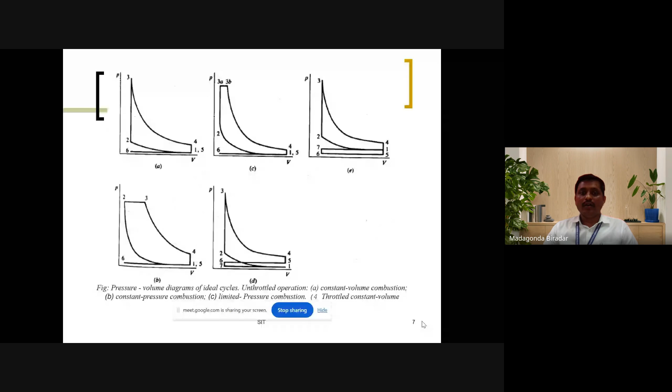I did my M.Tech from KREC Surathkal, currently NITK Surathkal, in the branch of heat power, and B.E. from Bangalore University in mechanical engineering. Sir has more than 60 plus national and international journal papers, and he has contributed to different numbers of chapters in books, totaling more than 4 chapters in different books. In conferences he has published more than 40 journals, and in international conferences more than 25.

Sir also has more experience regarding this clean energy for automobiles, and he has guided more than 10 students for PhD, more than 10 students for MTech by research, and more than 25 students for only MTech. Sir has lifetime membership in different bodies like the Combustion Institute, and was a BOE member at UVCE Bangalore. He was co-chair during the national conference in 2010 held at NIT Surathkal. He was also a member of the BOS at different institutes, both government and various private universities. Sir has delivered more than 50 invited guest lectures throughout the nation.

If I speak about the achievements of Dr. Kumar G N, it is a very long way, so I'll stop here with a short introduction. Sir, thank you, sir. I welcome you for this FDP, sir, which is sponsored by Atal AICTE, sir.

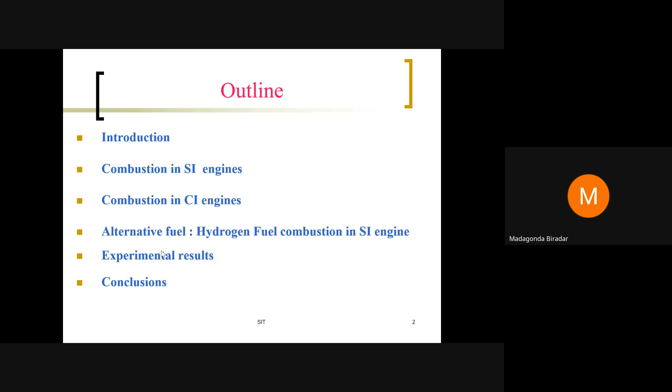Good evening, everyone. Actually, even my student is also there, my friend Chitragar. Good evening, Chitragar. Good evening, sir, and welcome to this platform. Thank you, very happy to see you come, sir, after a long time.

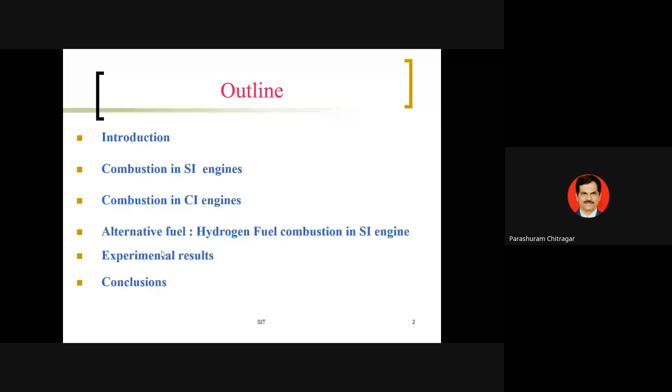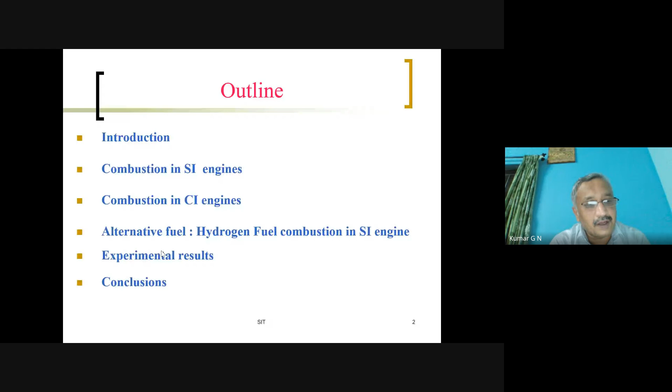Yes, sir. Dear friends, I would like to give some introduction to the IC engine, because nowadays electric vehicles are also competing with IC engines, and why this green energy is very, very important, I'm going to highlight with my presentation. If you have any queries, at the end I'll take the queries.

Fuel, I mean, is not a new concept. It has maybe 150 years of history, but still there is a lot of research going on related to the IC engine. Not only changing the design of the IC engine, but they are also working on fuel, because even by changing the fuel or cleaning the fuel, we can reduce the emissions produced by combustion. So combustion is a very important thing in the IC engine. Already as a mechanical engineer or energy engineer, we have studied thermodynamics, and we know that thermal efficiency is a very important parameter in combustion.

By that number, we can say whether the combustion is good or not, or the device is good or not. For example, whenever we buy a vehicle, the first thing we see is what mileage it can give. But at laboratory level, we generally measure specific fuel consumption, that is how much fuel is consumed for producing 1 kilowatt.

So combustion is a very important process in the IC engine, where chemical energy is converted into heat energy and then mechanical energy within the IC engine. It is an exothermic chemical reaction where fuel and air burn, and products plus heat are released. So how much heat is released is a very important thing for us.

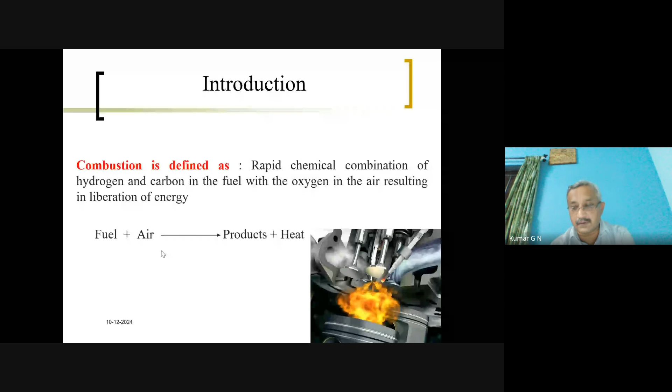It means we are saving a lot of fuel by improving the thermal efficiency, redesigning the engine, or changing the quality of the fuel. Now, about ignition: when we design any IC engine, we have to provide proper fuel and proper air.

Only then will the combustion be stable and proper emissions released, with the right quantity of heat liberated. Even if you make it a rich mixture, with more fuel concentration, or a lean mixture with more oxygen concentration, the combustion will not be stable. To make it stable, we have to operate with a limited fuel-air mixture.

For example, in a petrol engine, generally 14.5 kg of air is required for burning 1 kg of fuel. So near that stoichiometric condition, we can operate the engine, but if you go beyond some limit...

We have to keep in mind that it should burn properly, because in an IC engine we need more power in a given time, that is in milliseconds. So the combustion should be fast. The property of the fuel is a very important thing to keep in mind.

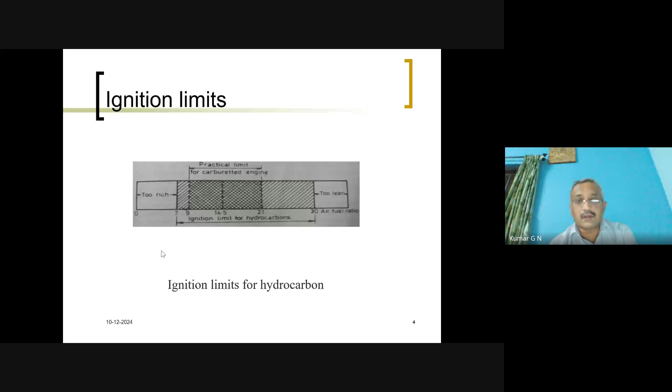This is a basic concept, not new. Our IC engine works just like a war cannon. In a cannon, what happens? We keep some gunpowder and ignite it.

In front of that, an iron ball will be there. As soon as we ignite, the gunpowder burns and tries to expand, that is, it explodes. Due to that, a high pressure wave is released and it strikes the iron ball, hitting it and making it move. We can analyze the same concept in an IC engine.

In an IC engine, there is a cylinder, and inside the cylinder, a piston. The piston movement is based on the combustion of the fuel. As I said, the combustion takes place in milliseconds, that fast.

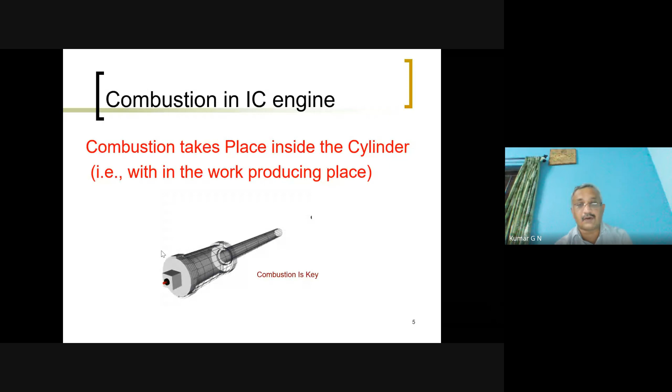Because every cycle may run at 1500 rpm, or for a racing car maybe 20,000 rpm, in a four-stroke engine the combustion should happen in terms of milliseconds. So even though it's a cycle, the duration of combustion is still very short. Based on this combustion, the IC engine's basic processes are defined.

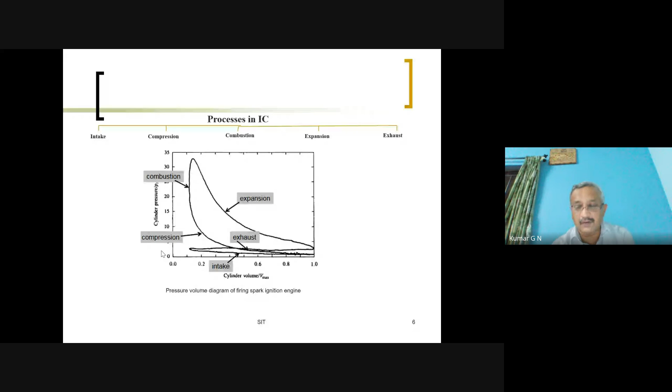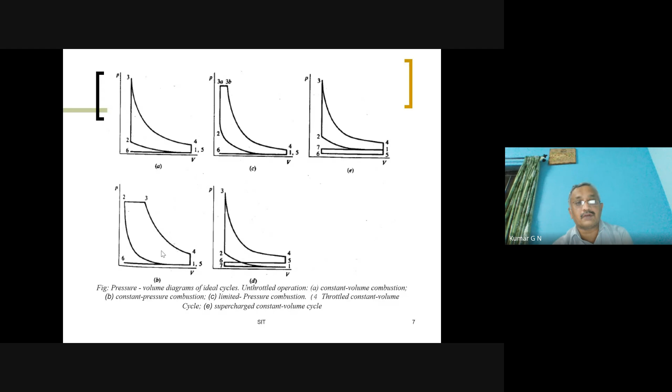There are different types of IC engines, including petrol engines with constant volume combustion, and diesel engines with constant pressure combustion, etc. In which process the combustion happens and how heat is added is very important. The petrol engine works on the Otto cycle and the diesel engine works on the diesel cycle. So based on fuel property, we choose the engine.

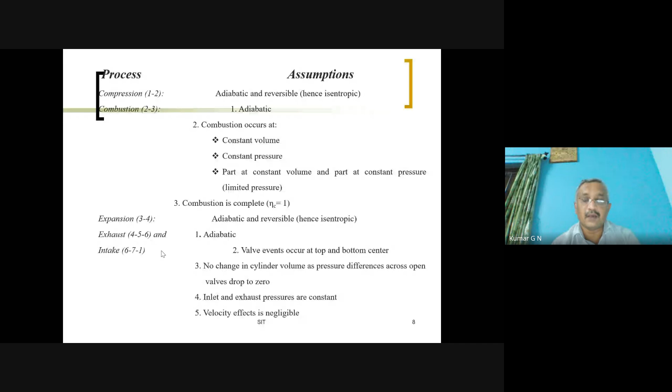Even nowadays, research is happening related to alternative fuels. For the spark ignition engine, we can choose LPG gas, CNG gas, or even hydrogen, which is what I'm going to present today. And with respect to diesel, even now the Government of India is talking about biodiesel or other alternative fuels.

Generally, it is a biodiesel, and even ethanol is used as an alternative fuel for the ICE engine.

With respect to engine design, we can improve thermal efficiency in two ways. One is by redesigning the engine, that is, the components can be redesigned so that the combustion will be good, and whatever power is produced within the cylinder will be transferred at the end, available in the shaft, the crankshaft.

With respect to the suction stroke, we already know the latest technology - they are trying to replace the valve with solenoid valves. When you see this, mechanical operated valves with solenoid valves allow us to avoid pumping losses and improve volumetric efficiency.

With respect to each stroke, a lot of research is happening and new technologies are introduced. Instead of natural aspiration, we have moved to the supercharger or turbocharger, so that we can pump more air. When we pump more air, we can pump more fuel and burn it. After burning, more heat will be released, and we can convert that into power. It means that for a given volume, we get more power output by adopting a supercharger or turbocharger.

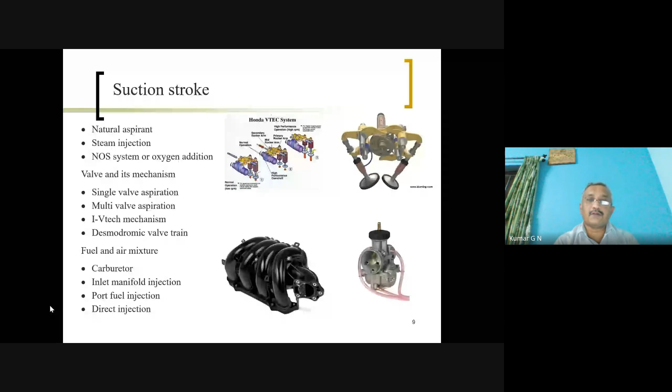With respect to the compression stroke, there is a variable compression ratio, even in running vehicles. Whenever we require a change in compression, we can do it, or even cylinder deactivation - we can cut off combustion in a multi-cylinder engine by operating with only one. So that new technology has come in, and as I said, the gasoline direct injection (GDI) system is already introduced, and most vehicles are coming with this technology.

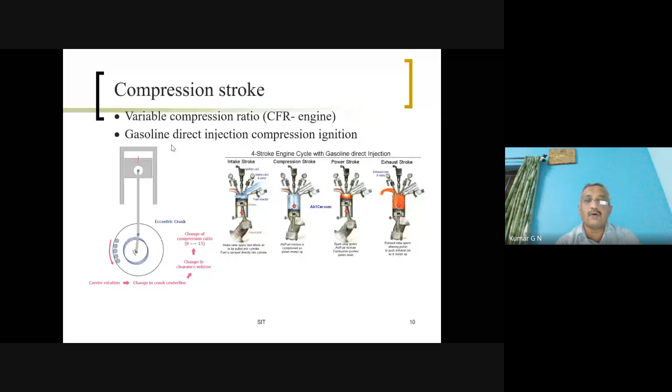And already, with respect to ignition, a lot of research is happening, and nowadays digital electronic ignition system is there. In the digital electronic system, it gives the minimum ignition energy and timing, because there is no misspark, whether you take a multi-cylinder engine or a single cylinder engine.

That heat addition - as seen in the first slide, fuel plus air, if two reactants are there, combustion won't be initiated. It requires some minimum ignition energy. That minimum ignition energy has moved from the magneto system to the digital electronic system. But the latest technology, at a laboratory level, is a laser ignition system. People are still working on that - it's not yet implemented in public vehicles, but presently the digital electronics ignition system has been introduced.

That is just like sorry. This is the old system. Just a minute.

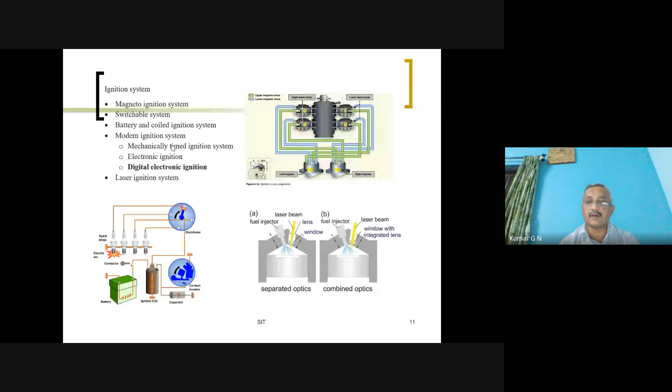Okay, this is the old system, and new systems are coming in. In the exhaust stroke and manifold, so as I said, by introducing a supercharger or turbocharger, we can improve the power output.

So that's one aspect. The second one is the catalytic converter, so that we can reduce the emissions, including carbon monoxide, unburnt hydrocarbon, or nitrogen compounds. So nowadays we are using SCR catalyst, selective catalytic reduction, so that NOx emission can be reduced.

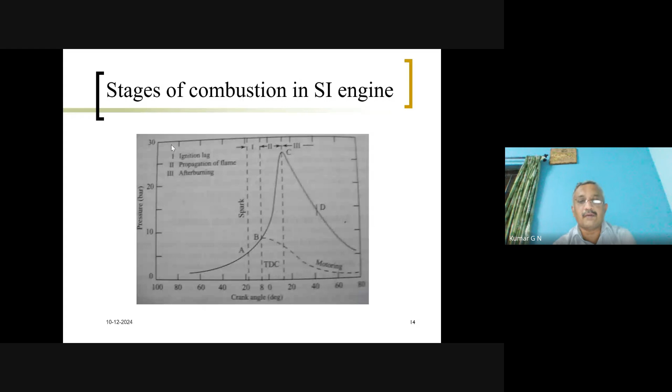Okay, so a lot of research is happening. These are individual topics, but I'm not covering these things. I'll be focusing on hydrogen.

So as I said, why alternative fuel and what are the benefits to the country? Maybe every day nowadays you might have seen e-vehicles are coming, electric vehicles. They are quoting that it is a zero emission vehicle.

Okay, but if you look into basic things, actually it's not a zero emission vehicle, that e-vehicle, because it requires electricity, and electricity we are producing using fossil fuels, maybe coal or diesel. So when we burn coal, again carbon monoxide or carbon dioxide will be released to the atmosphere, not in urban area, but wherever we are using electricity. In some other places we are burning coal or fossil fuels, and we are producing carbon dioxide and carbon monoxide, or harmful emissions, and we are adding to the atmosphere.

That is, total emission will be same whether you use them. But only thing is, when we produce electricity it's far from place, maybe 1,000 kilometers away from the urban city.

So when we supply current from one place to another place, there will be loss of electricity. That is, if you produce electricity at some 1,000 kilometers and supply to the urban area, maybe only one unit will be available and one unit will be lost. Out of 2 units, 1 unit will be lost and 1 unit will be used. So a lot of emission will be added.

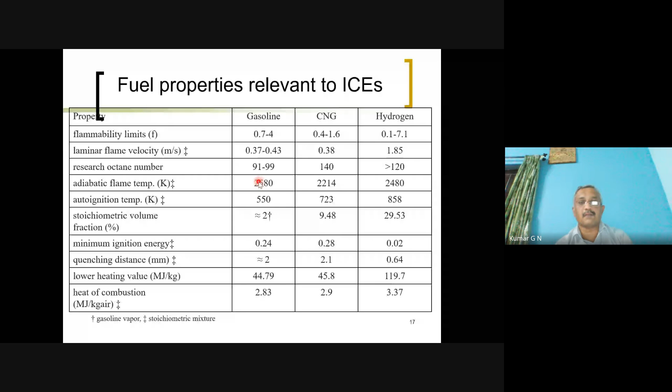Similarly, whenever we add any additives with gasoline, just improving the velocity or improving the octane number, sometimes the density will increase or the combustion may not be proper. So while choosing any fuel, we have to ensure proper combustion so that thermal efficiency will be improved and emissions will be less. These are the things we have studied in IC engines.

The flame speed mainly depends on this. With respect to the spark ignition engine, fuel ratio is a very important thing. Whether you work with petrol, as I said, we operate with an equivalence ratio of 0.9 to 1.1, and engine size also varies. If you go for a bigger size engine, sometimes we go for multi-spark ignition.

Ratio again - in the homogeneous charge compression ignition engine, we can use petrol or diesel, but again it's under laboratory conditions. With respect to the fuel, we can change the compression ratio so that we can optimize with respect to size or fuel ratio, and based on the application also.

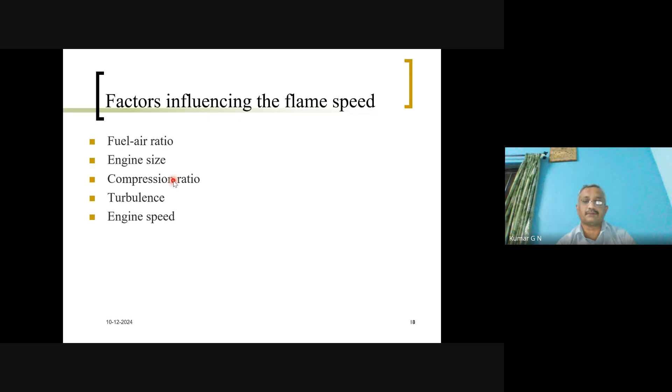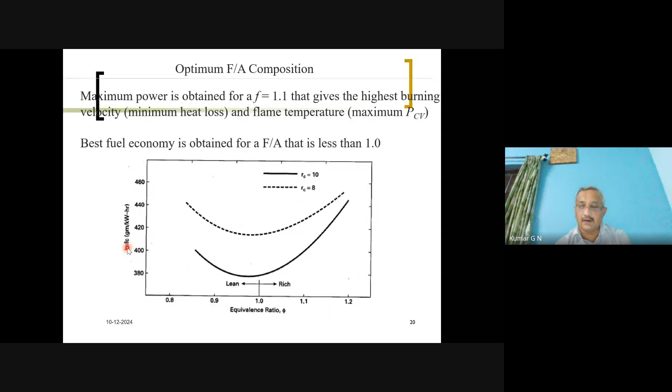With respect to spark timing, when we take any alternative fuel, we have to optimize the spark timing. That is also very important, otherwise the output power will be less.

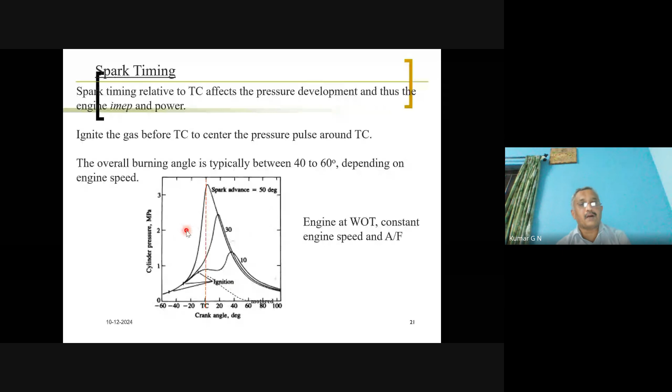When you produce a spark at 30 degrees, after ignition lag, the combustion happens normally, and when you measure the area under the curve, it will be better than the other cases. So for any alternative fuel, optimizing the spark timing is very important.

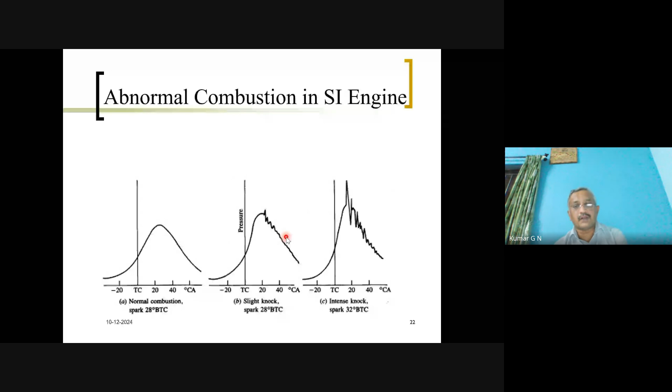If spark timing is not optimized, in designing an SI engine, abnormal combustion is another disadvantage. If the engine is not cooled properly or burning happens at different conditions, abnormal combustion occurs during the expansion stroke, starting at multiple places and producing abnormal pressure disturbances that strike the piston head, cylinder walls, or valves, causing erosion and increased engine vibration.

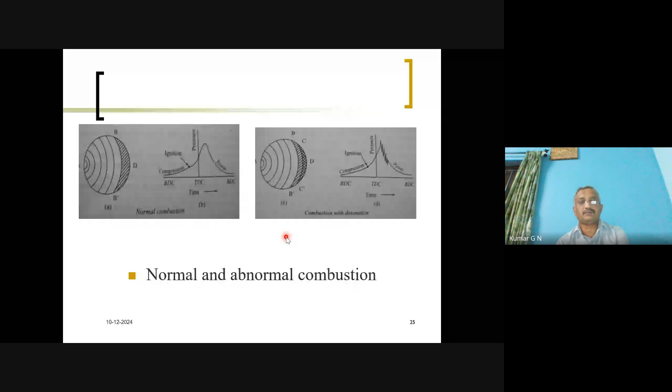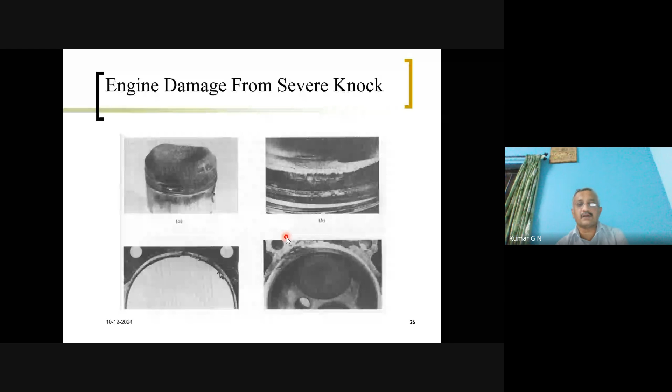Once knocking occurs, a high pressure wave strikes the surface and erosion takes place. You can see the shape of the piston head, edge of the piston, valves, etc., where erosion has happened.

Moving on to alternative fuel, why alternative fuel is required, and energy is also a very important thing.

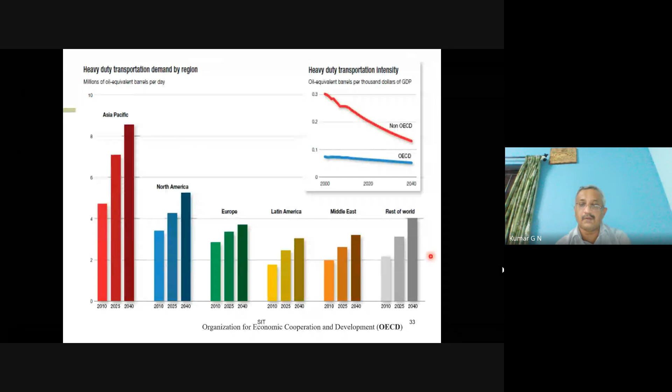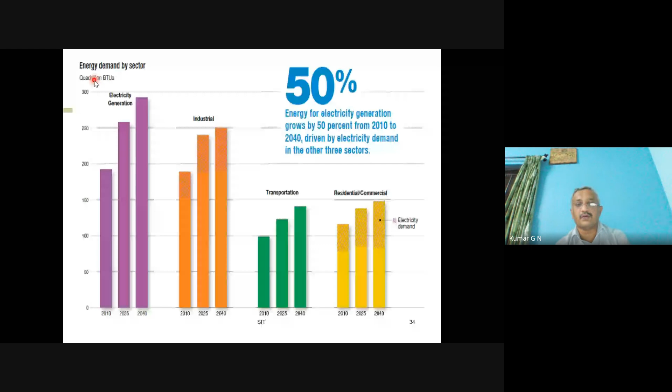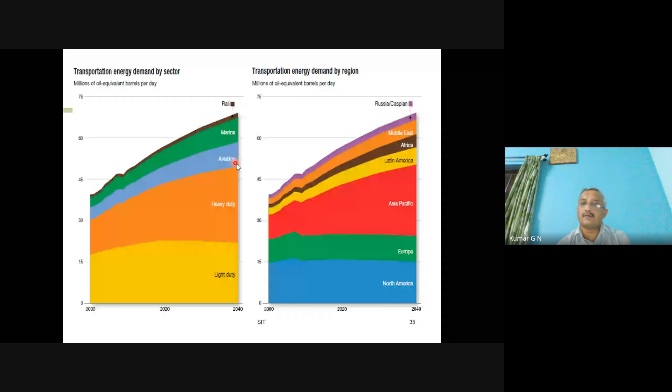And with respect to the countries, same information, and again the same information. You can observe here. So before that, we mainly depended on fossil fuel like gasoline, diesel, or jet fuel. But nowadays, a lot of research is happening related to ethanol and other fuels, including biodiesel. A lot of literature and methodology is available.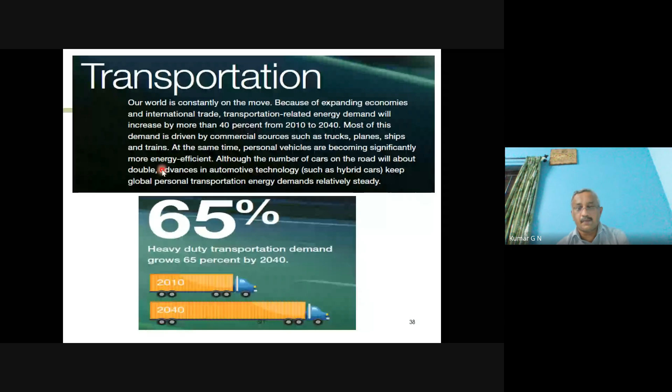And with respect to transportation, demand is growing, and because of this, carbon dioxide emission is also increasing day by day, because when we burn hydrocarbon fuel, whether petrol or diesel, again it's made up of hydrocarbon. LPG, that is propane and butane, CNG is methane - most of the fuels are hydrocarbon fuel. So when we burn hydrocarbon, carbon dioxide and nitric oxide emissions will be released to the atmosphere.

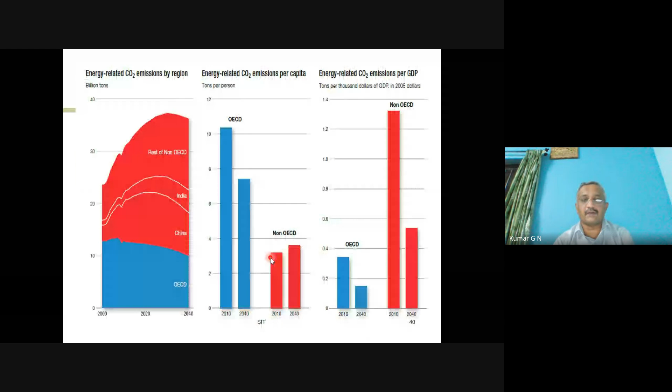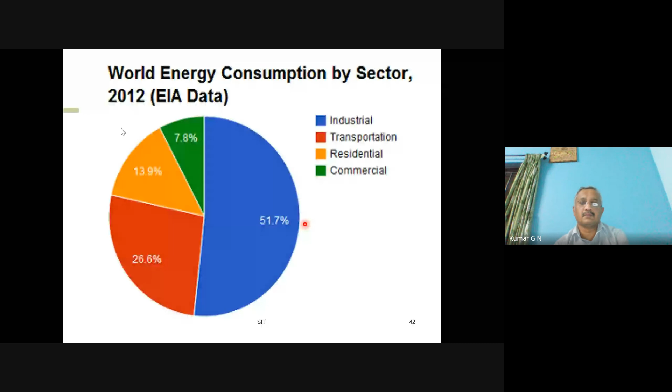Now, as I said, maybe in future we may move to fuel cell technology, but presently there are some disadvantages, and the technology is not mature enough to release to the public. Maybe once it gets stable and research happens, it will be released, other things will go up, and fuel cell technology will dominate.

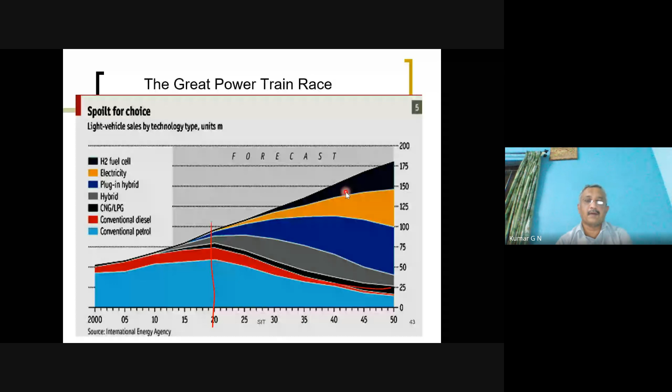So presently, even the government of India is giving importance to clean fuel, whether with respect to petrol, diesel, or any alternative fuel. So the present government is talking about clean fuel like hydrogen, because hydrogen is a single chemical component. After burning, it will produce only H2O, that is water. So if you operate within some fuel range, NOx emission can be reduced.

So like this - why the advantages? When you take anything, whether fossil fuels, again it is hydrocarbon, the hydrogen will be present. We can separate carbon and hydrogen, and we can store the hydrogen, because nowadays hydrogen can be produced from methane, that is CNG gas. So I'm going to tell that technology - methane reforming method.

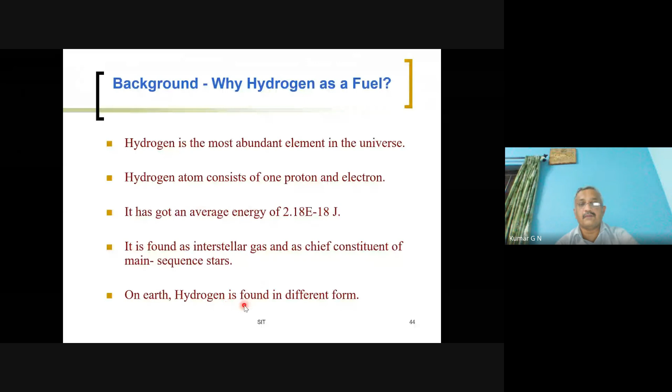Hydrogen atom consists of one proton, and this is the physics of hydrogen. You can observe it's found in different forms on the earth, but compared to petrol or diesel, it is not available very easily. Generally it is accompanied with another chemical element. If you want to separate that other chemical element, we need energy. So that energy cost is also included in hydrogen.

For example, in school days we studied the electrolysis method - water can be split into oxygen and hydrogen. But only thing is we need electricity. So it is expensive presently, but nowadays a lot of research is happening related to renewable energy. Using a gasification method, we can produce hydrogen, or we can go from liquid CNG gas or liquid natural gas and convert it into hydrogen. So there are a lot of new technologies, and people are working on the production of hydrogen.

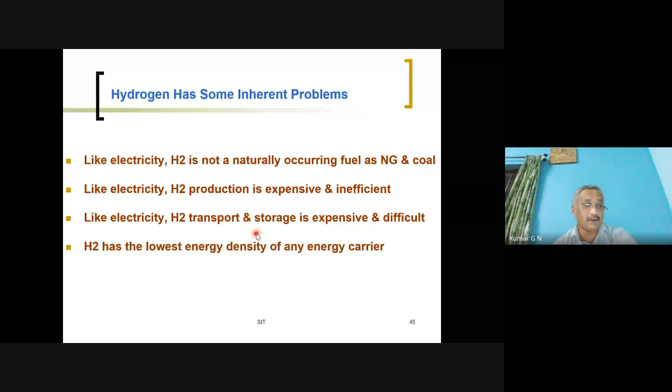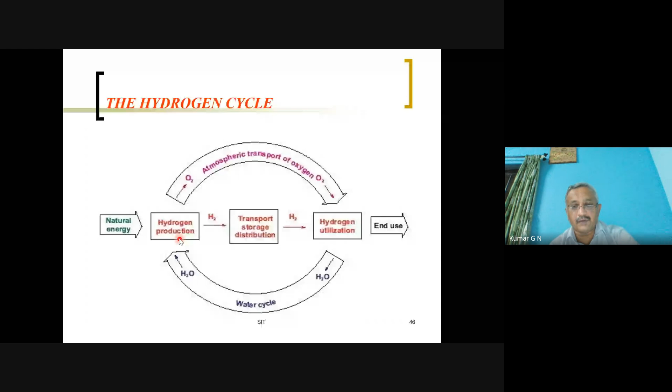When you see our present government's advertisements or publicity, generally it's given on hydrogen production, hydrogen storage, or hydrogen utilization. It's not only used in ICE engines, it can also be used in fuel cell vehicles. So a lot of funding is available with respect to production, storage, or utilization. The government is giving encouragement here.

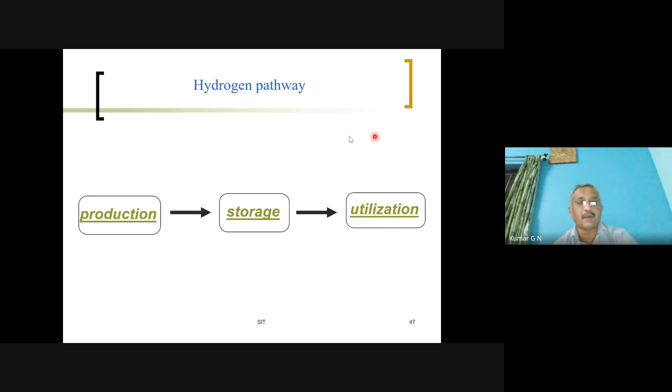When we focus on production, there are three popular methods. One is steam reforming, where we convert CNG gas into hydrogen. Second is electrolysis of water, using electricity and water to produce hydrogen. Third is renewable energy sources, where biomass including wood can be converted into hydrogen and carbon monoxide, which we can store. Other methods include direct thermal decomposition of water, decomposing H2O into H2 plus O2, which requires high thermal energy, maybe around 2500 degrees. But this is an expensive method. The next method, for safety reasons, uses nuclear energy.

Presently, even in India, people are working on all these three methods. Even IOCL in Faridabad is working on the steam methane reforming method, converting CNG gas into hydrogen. And in Dwarka, they opened a hydrogen fuel station, which is hydrogen plus methane, that is CNG gas. Generally they call it hydrogen fuel, and IOCL supplies it. Electrolysis of water happens everywhere throughout India. Presently, if you buy 1 kg of hydrogen, it costs around 2000 rupees. But once steam methane reforming comes more widely, the cost will decrease.

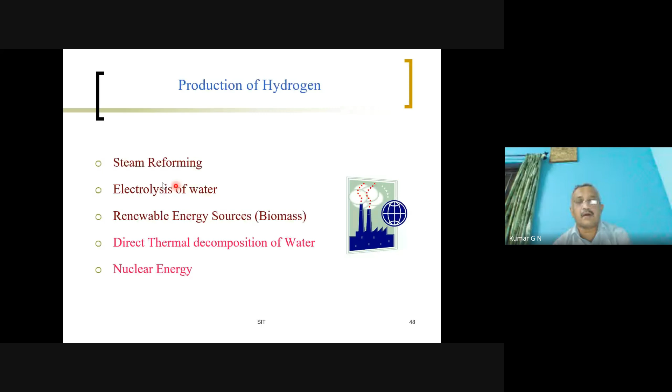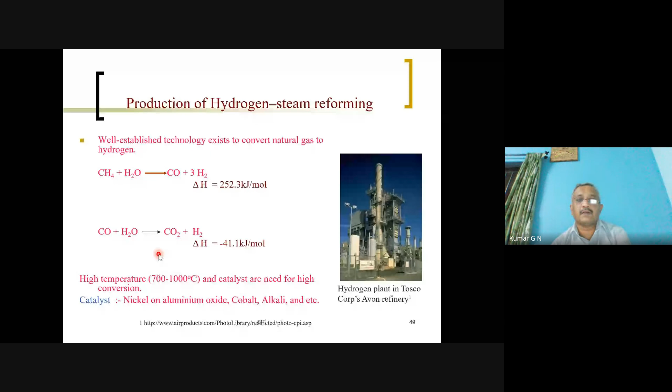When you take methane, it is reacted using some catalyst, nickel on aluminum oxide, producing carbon monoxide and hydrogen, which we can supply wherever we want. That is the advantage and disadvantage. You can observe methane is available, produced and transported through pipeline, or we can store it and supply through road transportation. In this method, steam and CNG gas is supplied, the temperature is maintained and catalysts are used, so finally hydrogen is produced.

Looking at the advantages and disadvantages: we can supply hydrogen through a pipeline system, and it is the most cost efficient current hydrogen process. However, it uses finite resources, because CNG gases are available only in limited places, so the plants we set up are limited by this resource. Also, rising natural gas prices mean the final price of hydrogen also mainly depends on the natural gas price.

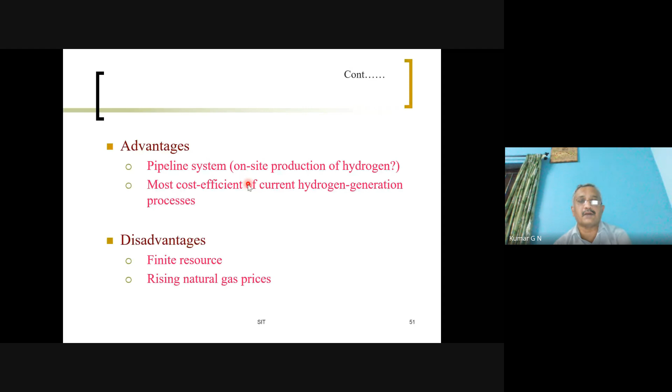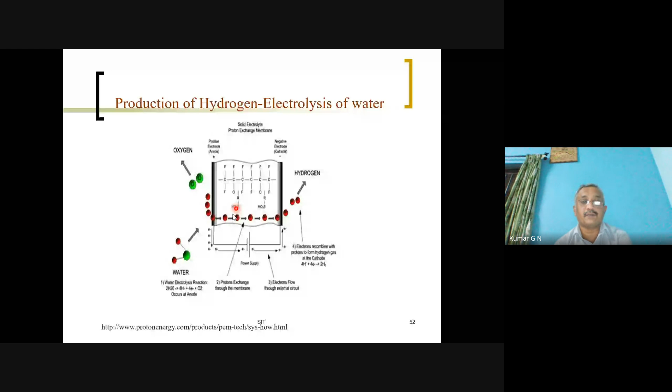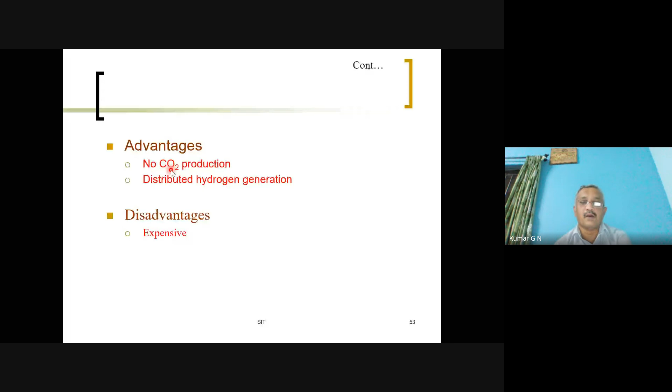This is the second method of producing hydrogen, electrolysis of water. You can observe hydrogen can be produced using electricity. The advantage is it's free from carbon dioxide, because after producing, only H2O, I mean H2 plus O2, will result. We can produce hydrogen wherever we want, and it's a small system, but it is expensive because we are using electricity.

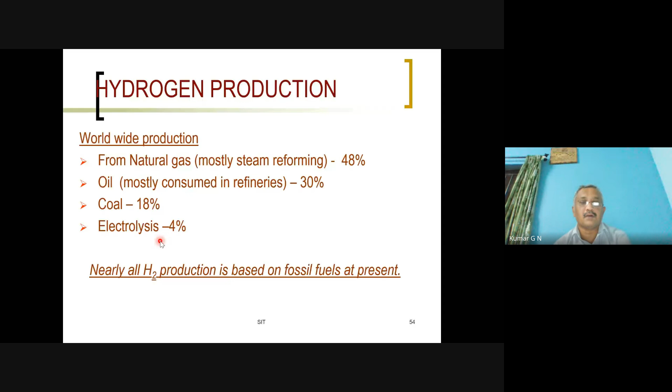I think one slide is missing here. Now, storage - you might have seen hydrogen cylinders, typically red cylinders made of steel. But nowadays, for automobile purposes, the cylinder materials have changed.

Hydrogen can be stored in three ways. First, as compressed gas, maybe up to 700 bar we can fill in a cylinder. Second method is liquid hydrogen - in India, ISRO and Tata Motors are working on this, because ISRO is expert in liquid oxygen and liquid hydrogen handling, and Tata Motors is developing fuel cell based vehicles, so maybe in future it will come. Third is metal hydride, as I said, IIT BHU is working on this method, where hydrogen can be stored in metal so that at high temperature, hydrogen is released and supplied to the engine.

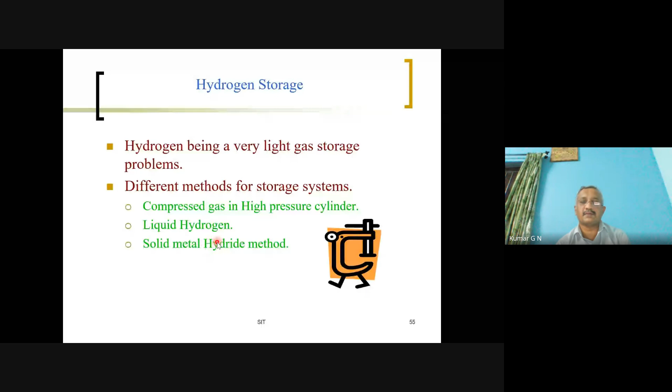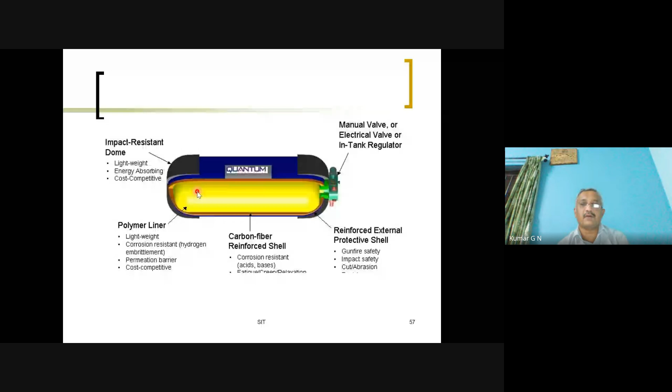This is the advanced version of hydrogen cylinders, nowadays available even in the Indian context. We can store up to 400 bar, or Type C cylinders up to 700 bar. For liquid hydrogen, a disadvantage is that the temperature must be kept very low - it's a cryogenic condition we have to operate under.

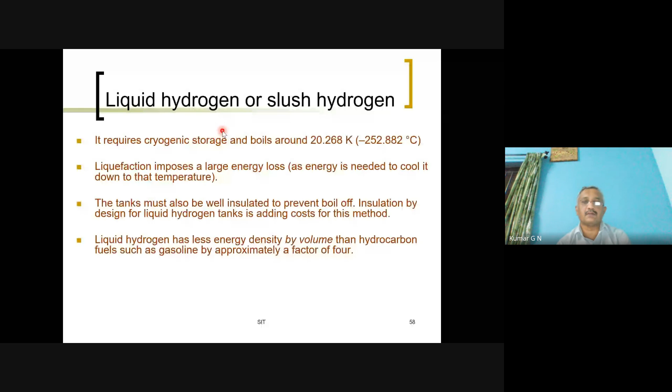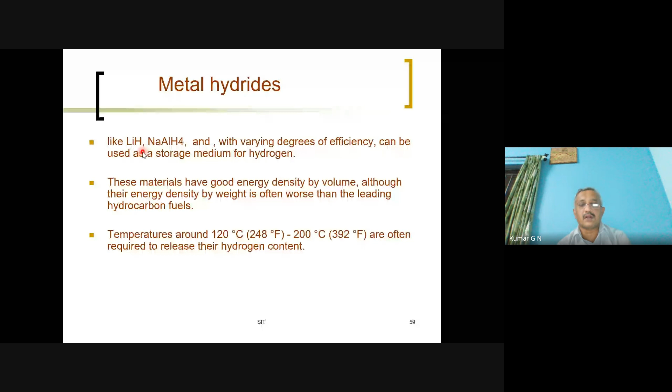Metal hydrides. You can observe lithium hydride or sodium aluminium hydride are used so that hydrogen is stored in metals, and at high temperature it will release and can be used. This is the work I did at IIT Delhi.

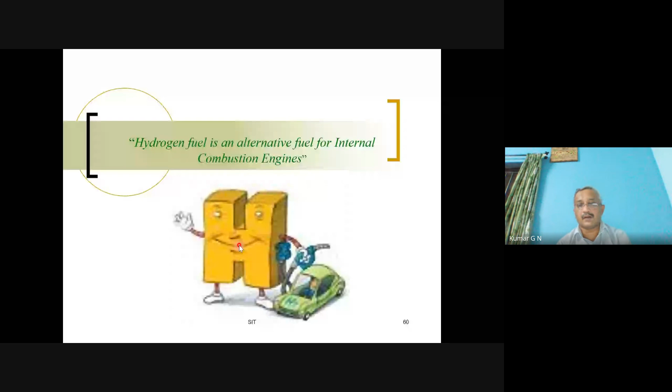Not only other people, even our former late Dr. Abdul Kalam ji also said we have to work towards clean fuel, that is hydrogen. By 2020 - but we have passed 2020 - the government of India is giving importance to clean fuel.

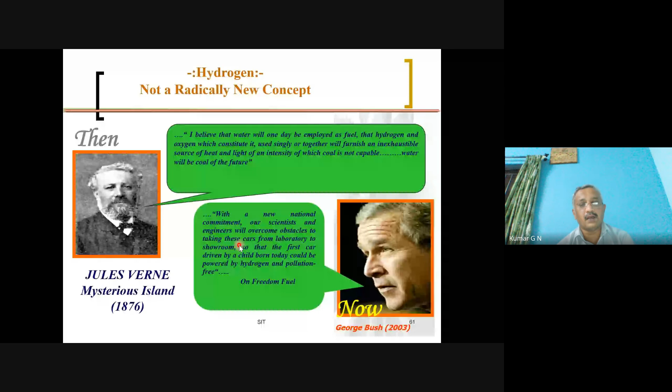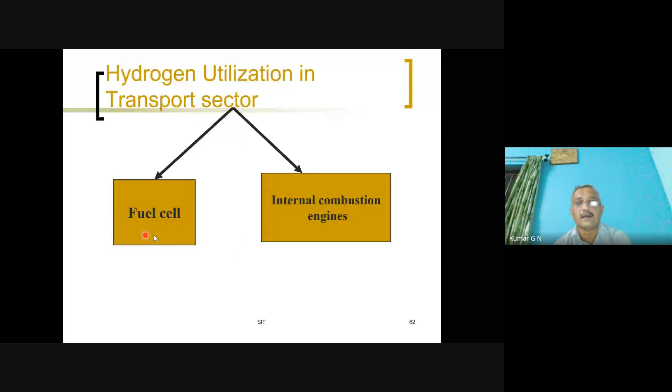So when we produce, or after transportation, the utilization is a very important thing. Not only for space application, on road also we can use it, in the form of two methods: one is fuel cell, and the second one is internal combustion engines. You can observe advantages and disadvantages with respect to hydrogen fueled IC engine and fuel cells.

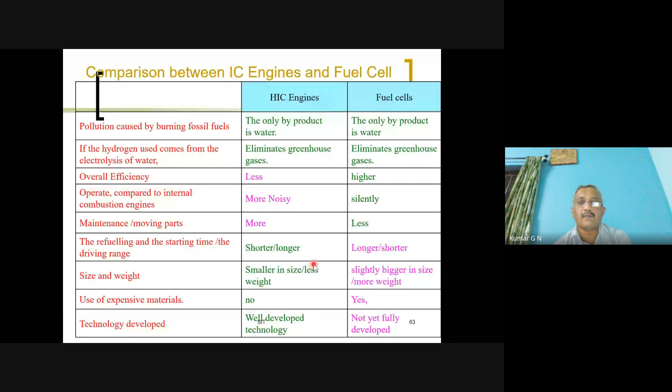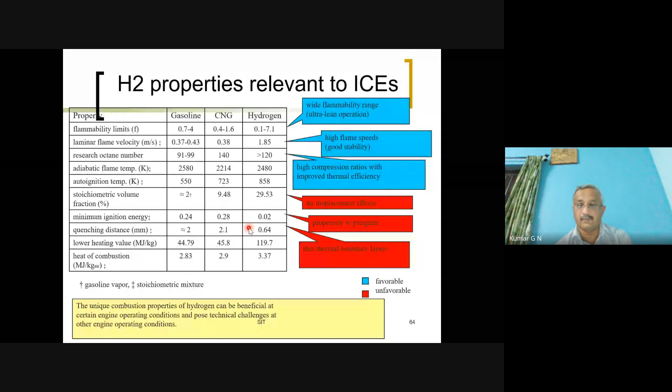When we develop an IC engine fueled with hydrogen, we experience this type of thing - or anybody, when you do a literature survey, you'll find flashback or backfire, pre-ignition problems, or rate of pressure rise. Flashback or backfire occurs due to the minimum ignition energy present in the valves or cylinder, or residual gases being present. This carries some heat energy that gets added to the hydrogen-air mixture. Combustion starts maybe during the suction stroke, or during the start of the compression stroke, and once combustion happens, the rate of pressure rise will be very high.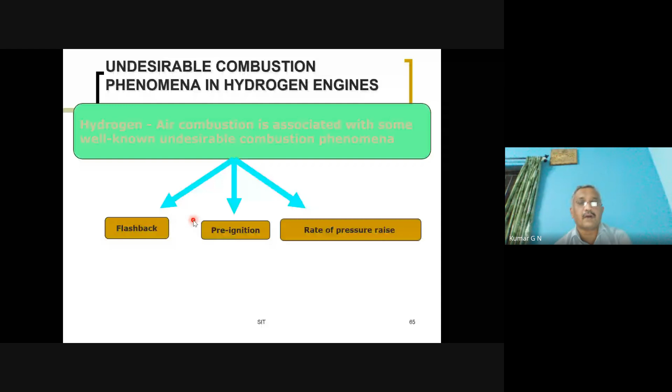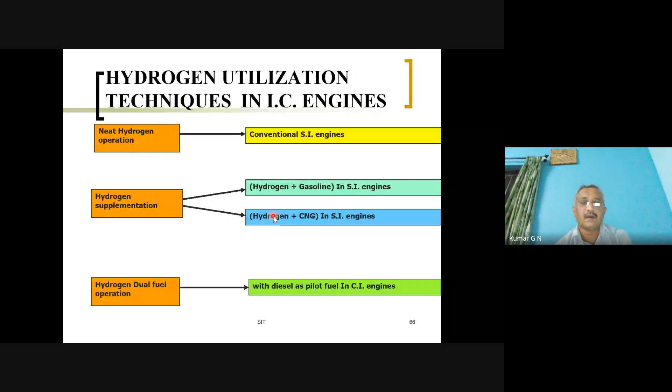We can overcome these disadvantages by developing a proper fuel injection system. So hydrogen can be used as an engine fuel, but only a few percentage of hydrogen is used in CI engines. In SI engines, we can completely or partially replace gasoline or CNG. These things I already told you in the beginning.

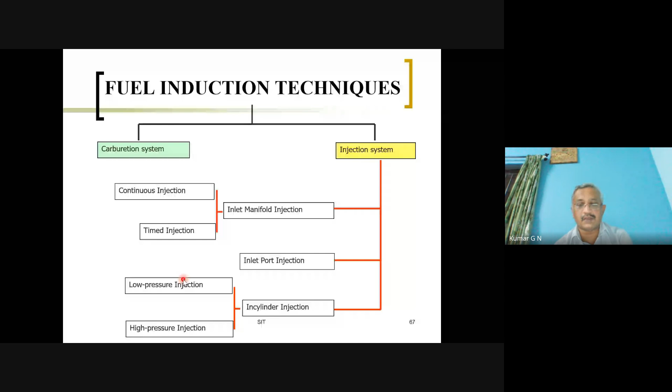Carburetion system, injection system - presently people are working on direct injection systems including hydrogen or CNG gas, where fuel can be injected directly into the cylinder, just like in a diesel engine.

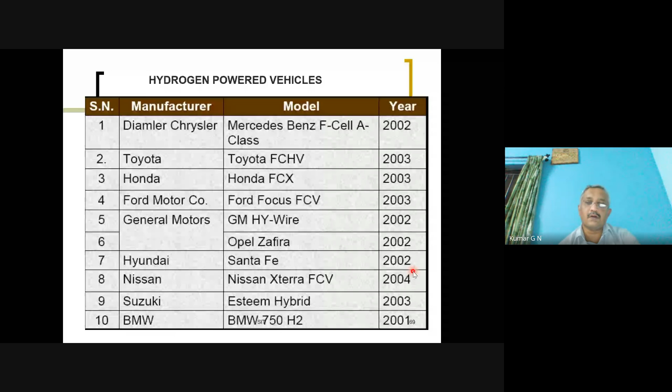With respect to the performance of the engine, what we generally see is the power output, the thermal efficiency, the emissions and other things. So after identifying the alternative fuel, the testing is done.

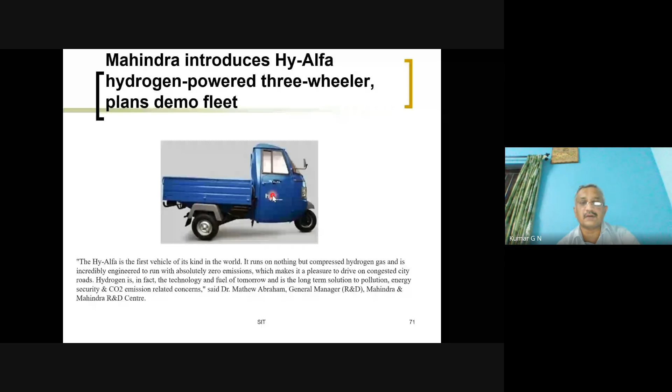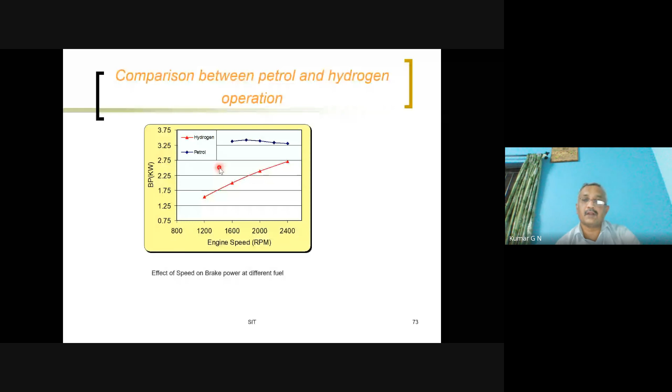You can observe the brake power with respect to hydrogen is less. As I said, we operated with a lean mixture, or less than a 0.6 equivalence ratio, so the power output will be less compared to... it's a single cylinder engine. But even so, the thermal efficiency is increased - that is, power output by energy input. You can observe it is giving better thermal efficiency compared to petrol.

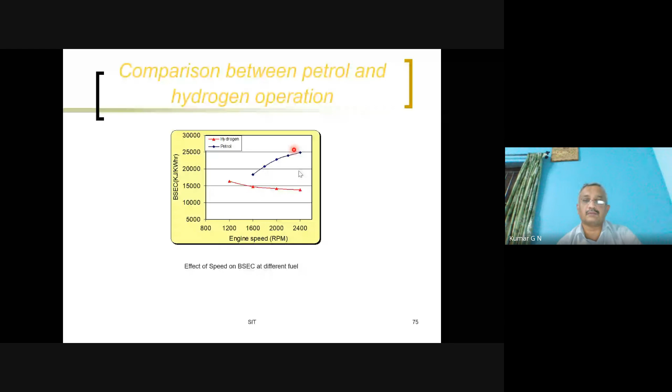So it is inversely proportional to thermal efficiency, meaning less fuel consumption with respect to petrol. But another disadvantage of this hydrogen engine is volumetric efficiency.

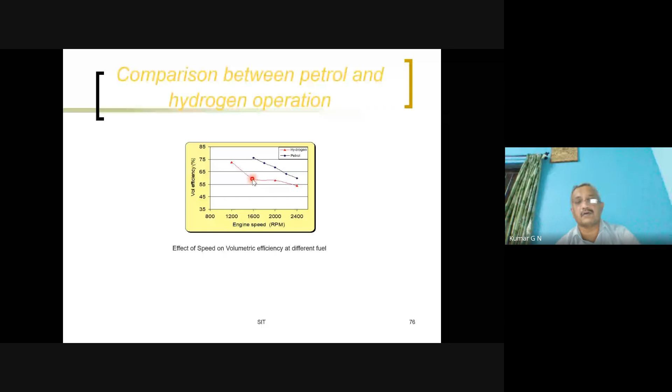As I said, the density of the fuel is 0.08 kg per meter cube. In the last slide you have seen when you take 100 cc of cylinder volume, 30% filled with hydrogen and 70% air. What I want to say is the volumetric efficiency is less because of the lower density of hydrogen.

Emission will be there, but nowadays, as I said, SCR devices are available - that is the selective catalytic reduction. We can place it in the exhaust gas tailpipe so that NOx can be reduced.

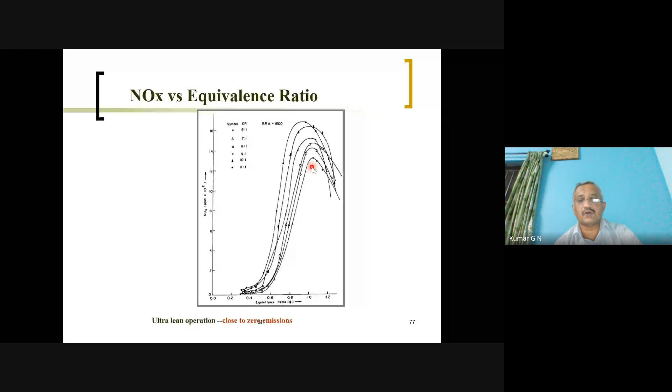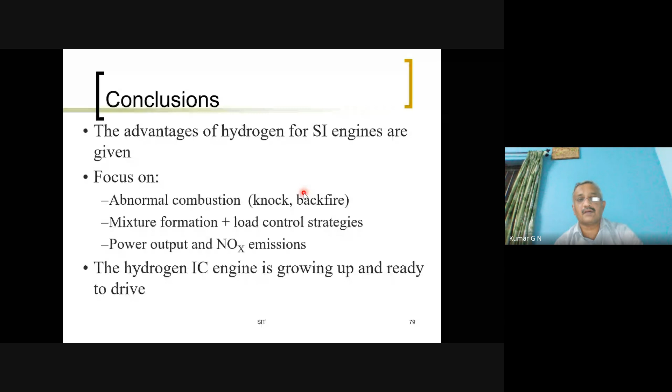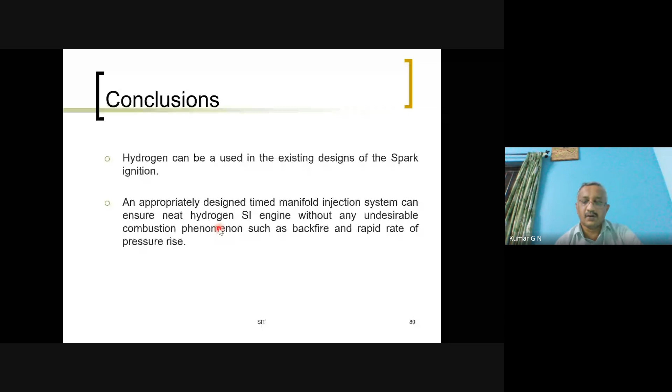So this is the summary, with respect to production and the development of the engine. With an appropriate design manifold injection system or direct injection system, undesirable combustion phenomena can be reduced. So this is the last slide.

What I want to say is hydrogen will be the future fuel, and it will be the perfect fuel for a more populated country like us, because even we have seen in Delhi when October, November, December comes, pollution problems will always be there. That can be avoided, or we can minimize it. I'm not saying it can be 100% removed, but it can be minimized using hydrogen as a fuel in metro cities or wherever population is high.

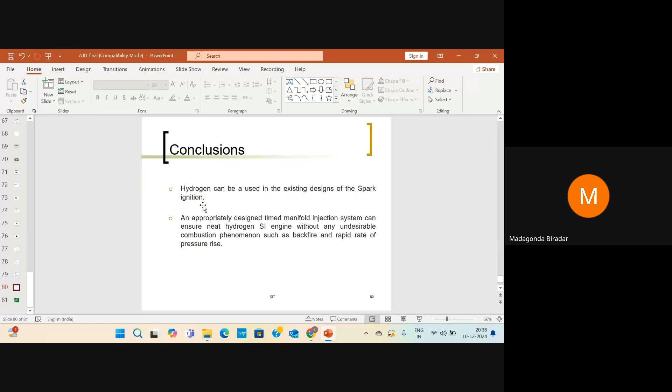Good evening, sir. Good evening, very nice to see you. Thank you, it was a very excellent and nice presentation, and you have shared your experiences in the field of IC engines as well as hydrogen as a fuel - a great contribution to knowledge. I also visited your lab in May 2024 during an MBA visit. Dr. Chitragar was there during that time, he is one of the participants. I am Dr. S.N. Sapli from COE Pune, College of Engineering Pune. Nice meeting you, sir. You have shared knowledge related to hydrogen, so that is fantastic - value addition to the attendees.

So one small doubt I have: with all parameters being optimized in petrol engines, what is the maximum compression ratio one can achieve?

See, presently, for example, petrol compression ratio for a petrol operated engine may be around nine. With respect to hydrogen, we can go up to 12 or more. Only thing is, right now we are working with a timed manifold injection system, but once direct injection system comes, we can go for even higher compression ratio by checking the knocking.